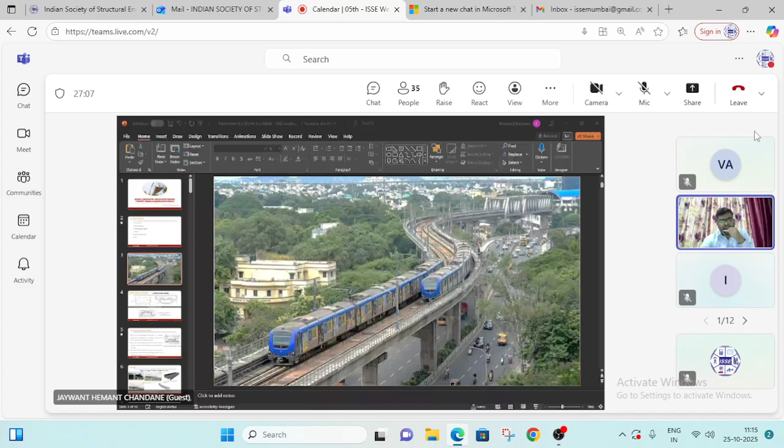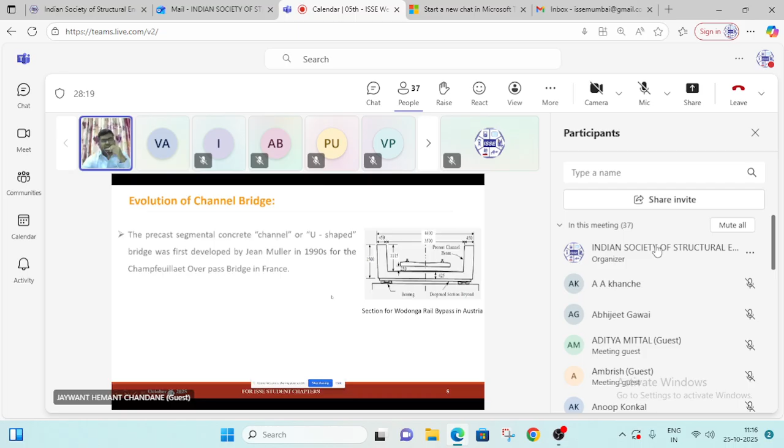Yes, the precast segmental channel, U-channel shaped bridge, was developed by Jean Muller in the 1990s for Champfeuillaet Overpass in France. Actually he is a bridge engineer, and he closely worked with Freyssinet also, who introduced the PSC phenomenon.

After this, the very famous consultant Systra developed the precast prestressed concrete U-shaped bridge, based on the original channel bridge constructed in France. Systra has done much research on the U-girder and has patented it.

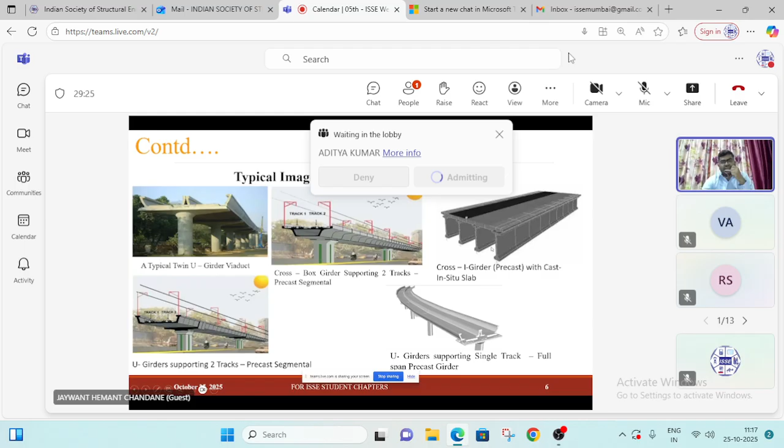Here are the different types of superstructures. In figure one we can see the twin U-girder viaduct, then box type girder supporting two track I-girder, then U-girder with two tracks, and U-girder supporting a single track rail. Our point of discussion today is the U-girder supporting a single track.

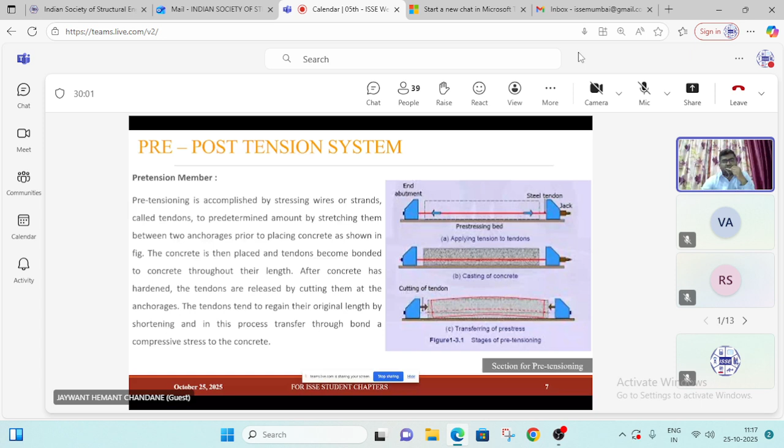Let me introduce the phenomenon of post-tensioning and pre-tensioning. In pre-tensioning, we first prepare the bed, and the cables are stressed. Then after 3 to 4 days, the concrete is laid over it, and at the time of transfer, there is some hogging portion we have to observe.

This hogging is because of the eccentricity developed during the stressing transfer. So the girder will hog at the time of transfer, and then it will reduce after application of self-weight, application of SIDL, and application of live load. So we have to check hogging also in this girder. This is the phenomenon of pre-tensioning.

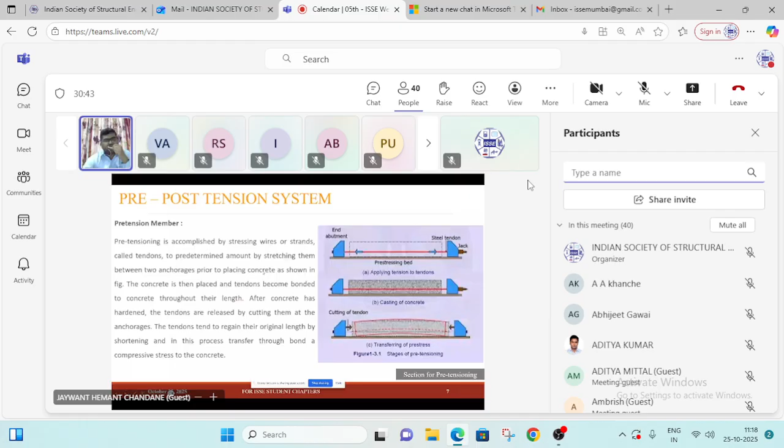Then post-tensioning: in post-tensioning the concrete is poured first, and the tendon HDPE duct is placed along the profile. In that we have the freedom to profile the cable inversely to the shape of the bending moment, because in post-tensioning we give tension to the cable after concreting. So we can profile the cable with respect to the shape of the bending moment, and there will be a number of cables.

The HDPE pipe is kept at the time of concreting. Then, after achieving some strength, the tendons are placed at their position and then stressed. So this phenomenon is for post-tensioning.

Now we come to the losses in pre- and post-tensioning. In pre-tensioning, the losses are: loss due to elastic deformation, loss due to relaxation of steel, loss due to shrinkage, and loss due to creep. While in post-tensioning, there is loss due to elastic deformation in concrete if wires are tensioned successively.

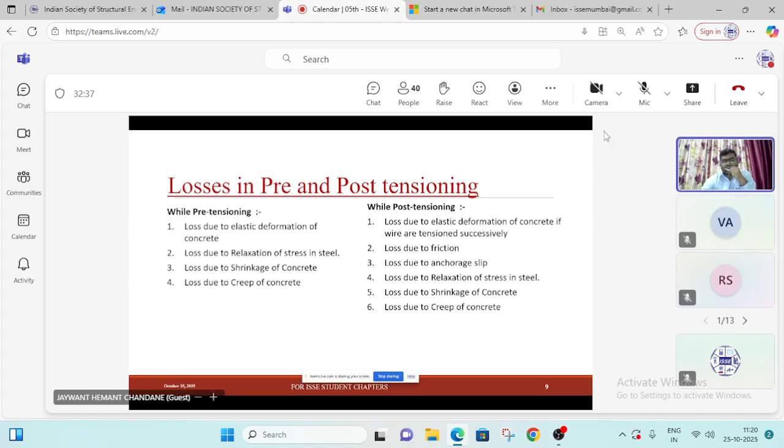Suppose in a beam there are three cables. First we tension the bottommost cable, so there is no loss due to elastic deformation in post-tensioning at that point. But after the second cable is tensioned, there is some loss in cable one because of the shortening of the concrete. And when we tension the third cable, there is no loss in the third cable, but there is loss in the first and second cables. So successive loss occurs due to elastic deformation in post-tensioning.

Then loss due to friction. While stressing, there is friction between the concrete and the tendon, so this loss due to friction is present in post-tensioning.

Loss due to anchorage slip: when the wedges are released after immediate stressing, there is a slip in the anchorage, which we consider as maximum 6 mm. Then loss due to relaxation.

The relaxation loss occurs because the stressed steel relaxes over the period of time, so relaxation loss comes into the picture. Then loss due to shrinkage and loss due to creep. The loss due to relaxation, loss due to shrinkage, and loss due to creep are the long-term losses in prestress.

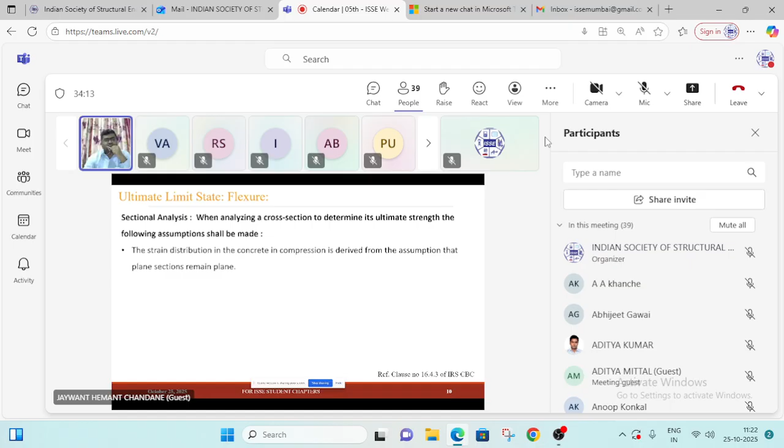So in section analysis, when analyzing the cross section for its ultimate strength, the following assumptions are made. The strain distribution in concrete in compression is derived from the assumption that plane sections remain plane. The stress in concrete in compression is derived either from the stress-strain curve or using the partial safety factor gamma m equal to 1.5 for FCK, in the case of a rectangular or flanged section with the neutral axis in the flange.

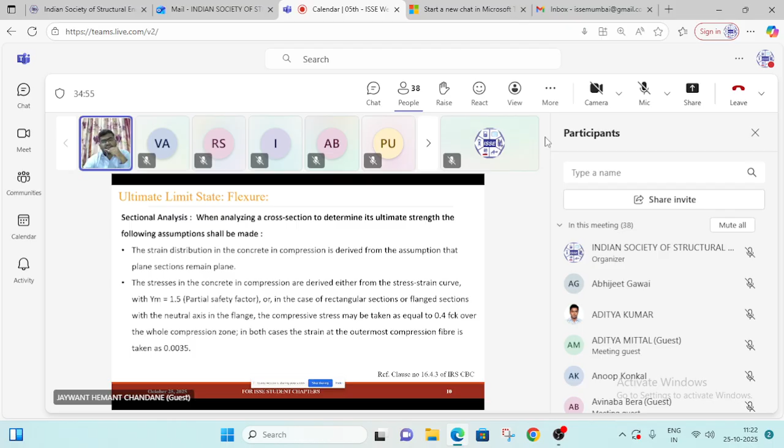For the compressive stress, it may be taken equal to 0.4 FCK over the whole compression zone, considering 0.4 FCK as a uniform distribution in the compression zone. In both cases, the strain at the outermost compression fiber is taken as 0.0035, the strain value of the concrete, and the tensile strength of the concrete is totally ignored.

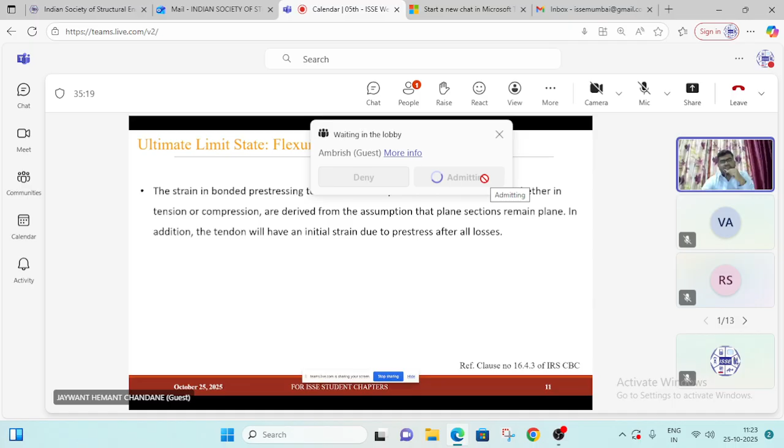The strain in bonded prestressing tendons and any additional reinforcement, whether in tension or compression, is derived from the assumption that plane sections remain plane. In addition, the tendon will have an initial strain due to prestress after all losses, meaning the additional tension reinforcement also needs to be considered.

The stress in bonded prestressing tendons, whether initially tensioned or untensioned, and additional reinforcement, are derived from the appropriate stress-strain curve, with gamma equal to 1.15 as the factor of steel representing the tendon.

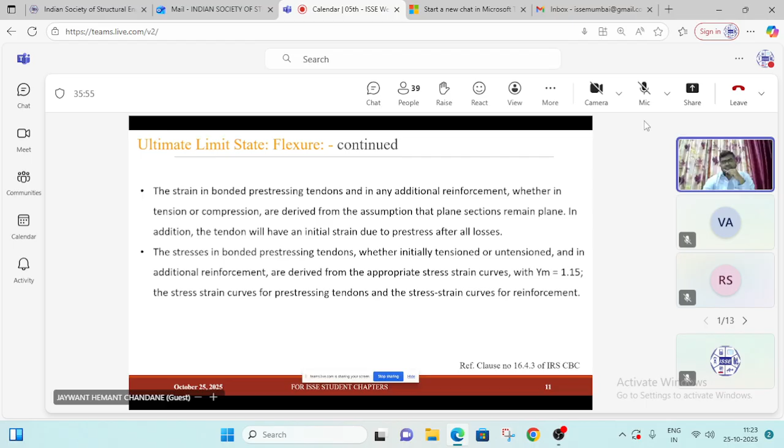Here the diagrammatic representation of that concept of the ULS. Here X is the depth of neutral axis, and as written in theory, for FCK there is a uniform distribution of stress, where MU is equal to FPB APS multiplied by the bracket d minus 0.5 x.

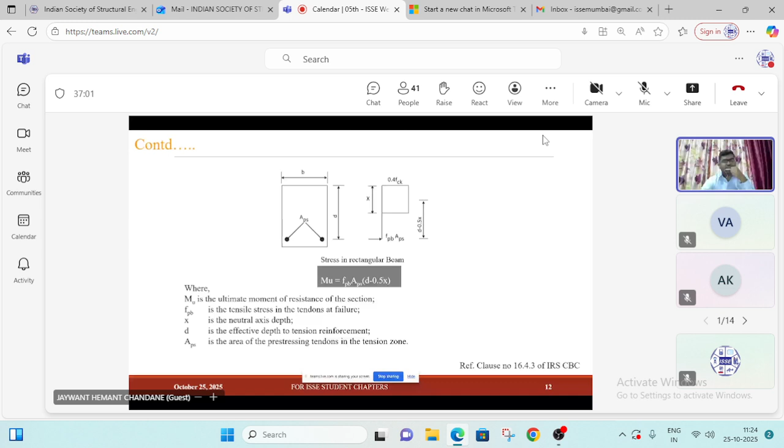The theory is also mentioned in IRS clause number 16.4.3 of IRS CBC. Calculation of shear reinforcement, and shear is calculated only for ultimate limit state.

At any section, the ultimate shear resistance of the concrete VC shall be considered in both the uncracked and cracked flexure condition, and any necessary shear reinforcement shall be provided. For a cracked section, the condition of maximum shear with coexisting bending moment, and maximum bending moment with coexisting shear, both need to be checked.

In the calculation of VCO, the value of FCP shall be derived from the pre-stressing force after all losses have occurred, multiplied by an appropriate factor value of gamma FL, which is the partial safety factor.

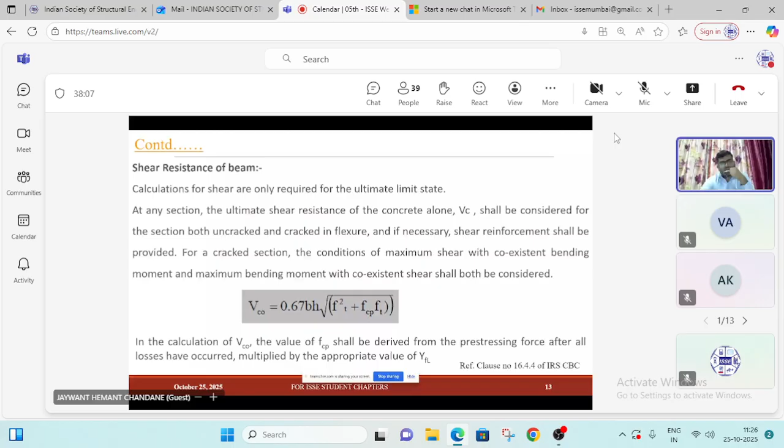And then FT is mentioned here. FT is the tensile stress of the concrete, which is 0.24 times the square root of FCK. FCP is the compressive stress at the centroidal axis due to pre-stress. B is the width of the member, and H is the overall depth of the member.

So by all these values we will get the VC, and the minimum reinforcement shall be provided by this formula: ASV by SV is equal to 0.4B by 0.87 FYV.

Here FYV is the characteristic strength of the stirrups, which shall not be greater than 415. Suppose we use FE 500, then also we have to consider 415 only as the maximum limit. ASV is the cross sectional area of the leg. SV is the spacing of the stirrups, and minimum shear reinforcement shall not be less than 0.2% of the web area in plan for mild steel, and 0.12% of the web area in plan for HYSD bar. This is as per clause number 16.4.4 in IRS CBC.

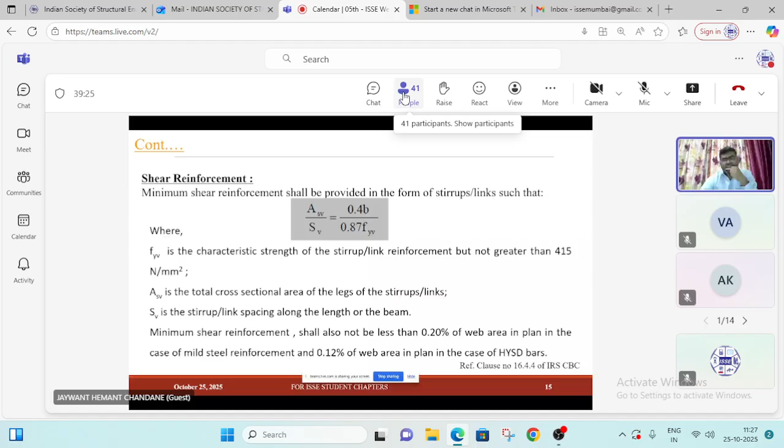So before we can start the problem now, there are various software used for the analysis. So I will present a few software here: STAAD Pro, Midas, Sofistik, and Lusas.

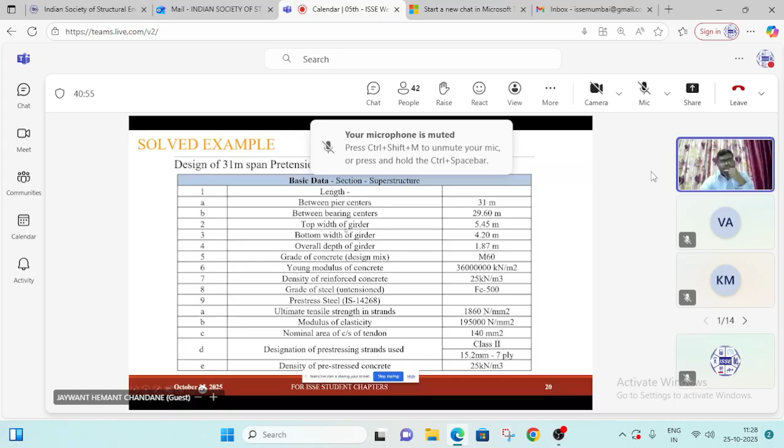Then the top width of the girder I have considered as 5.45. Bottom width of the girder I have considered as 4.2. Overall depth of the girder is 1.87, and concrete grade for the concrete mix design is M60, and Young's modulus is 36 into 10 raised to 6. Density of concrete is 25 kilonewton. Grade of steel is Fe 500. Prestress ultimate tensile strength of strand is 1860.

And modulus of elasticity of PSC strand is 1.95 into 10 raised to 5. And the nominal cross sectional area of the strand is 140 mm square, for the 15.2 mm 7 ply system. Density of pre-stressed concrete is 25 kilonewton per meter cube.

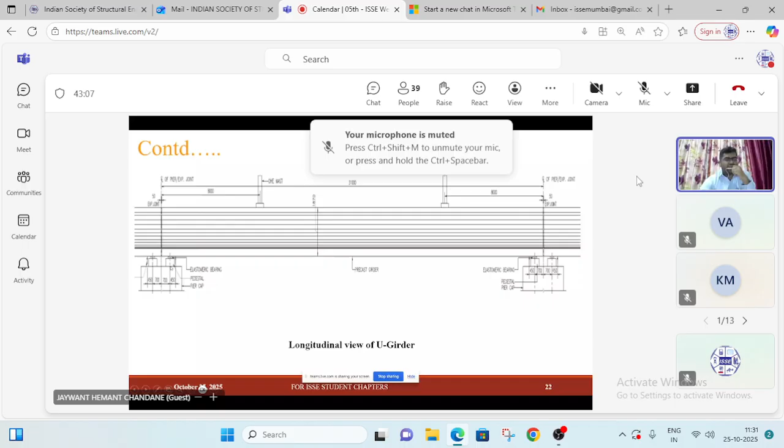The methodology adopted: STAAD Pro software is the main software used to work out the analysis, and Excel is used for presenting the results and conclusions. 2D analysis will be carried out for the longitudinal analysis, and 3D analysis will be done in transverse direction with respect to the plate element in STAAD Pro.

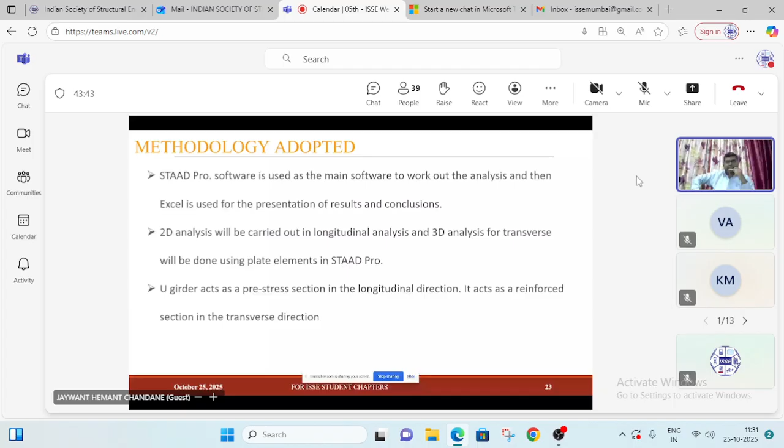So the U-girder acts as a pre-stress section in the longitudinal direction, and it acts as a reinforcement section in the transverse direction.

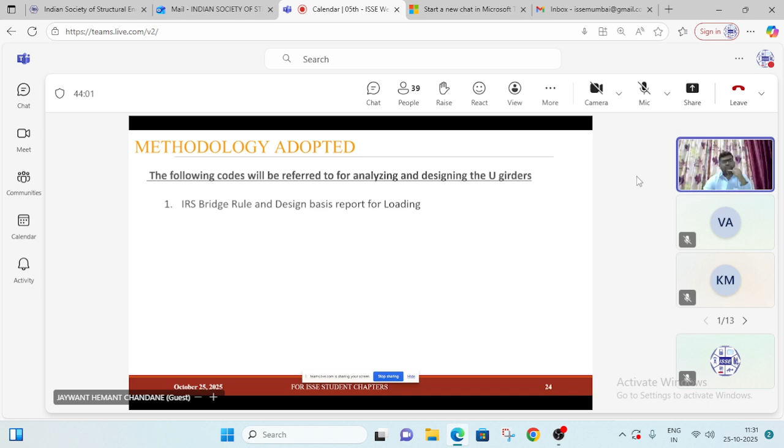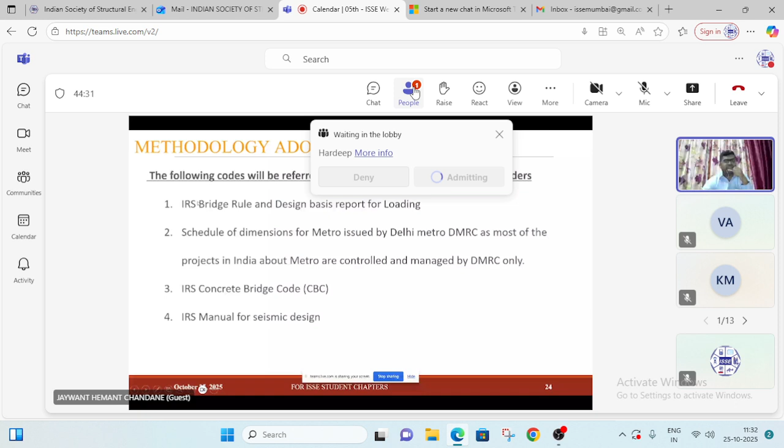The following codes will be referred to in the analysis and design of the U-girder: IRS bridge rules and the design basis report for loading, and the schedule of dimensions of metro issued by Delhi Metro DMRC, as most metro projects of India are controlled and managed by DMRC only. IRS CBC is a design code from the railway, and IRS manual for seismic design. Basically, IRS bridge rules give all the loading details and impact factor for the live load, the schedule of dimensions is considered from DMRC, and IRS concrete bridge code is the design code.

After analysis, we will design with respect to the IRS CBC code, and for seismic load calculation, we use the IRS seismic manual.

The temporary stress in the extreme fiber: the permissible compressive stress as per table number 24 of IRS CBC is 0.5 of FCK at the time of transfer stress. I have considered 40 MPa, so 40 into 0.5 is 20 MPa. The permissible temporary tensile stress is 1 Newton per mm square.

But the stress in extreme fiber at service condition is 0.4 of FCK. As earlier mentioned, if we use M60 grade, M60 into 0.4 is 24, and there is no tensile stress permitted during service.

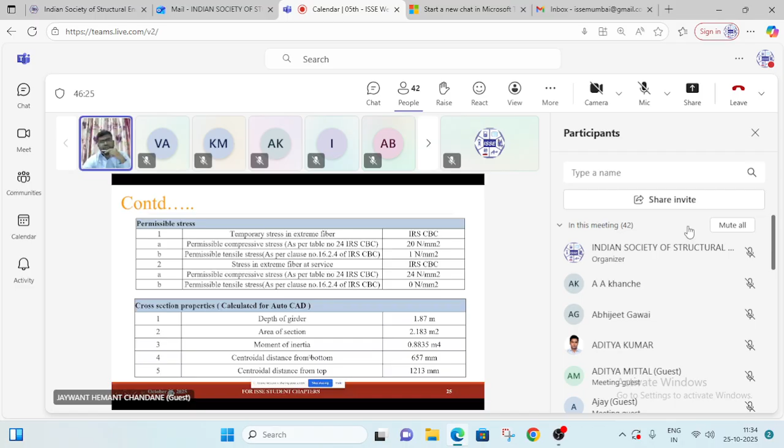The girder dimensions and sectional properties are calculated from AutoCAD. So 1.87 is the height of the girder, and cross section area of the girder is 2.183. Moment of inertia is 0.8835, and CG from bottom is 657 mm, and CG from top is 1213 mm. This dimension will be referred to further for the stress calculation at various intervals, so this dimensioning is very important for the further calculation of mass properties of the section.

Now the superimposed dead load is considered from DBR: rails, cable through cable tray, handrail, plinth slab, lightweight deck drainage, OHE mast, and miscellaneous. For double track, the summation is 6.05 ton per meter, and for single track it is divided by 2, so 3.05 ton per meter.

So intensity of dead load - now we come to the loading part of the longitudinal analysis. Intensity of the dead load is coming from the cross section area into the density of concrete: 2.183 into 25 is 54.575, and superimposed dead load is 3.05 ton per meter, which converts to kilonewton per meter: 29.92 simply multiplied by 9.81. We have also considered the solar panel load at the U-girder, which is 0.5 kilonewton per meter.

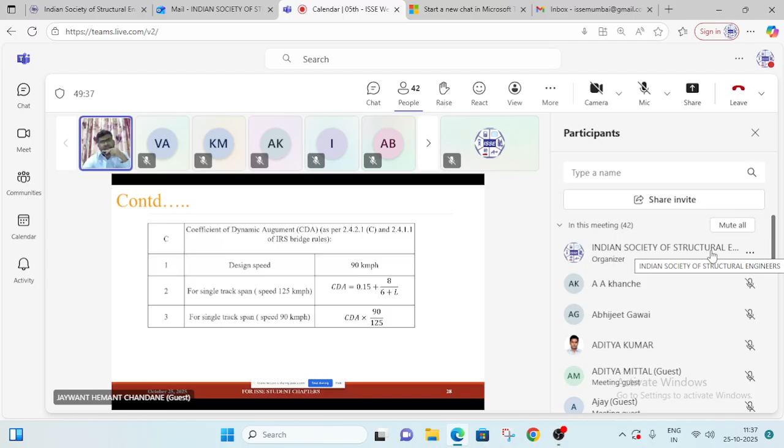Our design speed I have considered is 90 kmph, and the code has given the CDA for 125 kmph. CDA is equal to 0.15 plus 8 divided by 6 plus L, where L is the span. So for 90 kmph, that ratio we have to multiply it.

Then the modeling I have done - the superstructure analyzed as a complete beam model, representing the total length of 31 meters, and I have provided nodes at certain intervals. It is required to check the stresses at certain levels, around every 0.5 to 1 meter level throughout the span. So for taking the bending moment and shear force at that location, I have introduced nodes in between, throughout the span, with dimensions ranging between 0.5 to 1 meter.

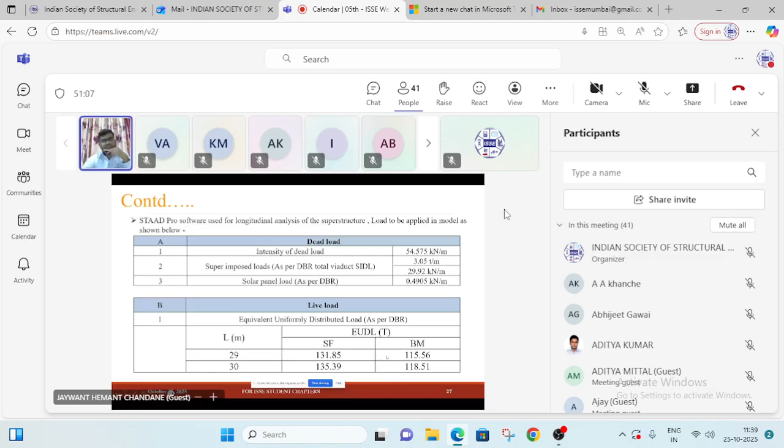The vertical train load can also be carried out by running the train through a line model, by providing a live load definition. That is the second method, but I have used the equivalent EUDL method, where we simply apply the UDL on our member.

The property mentioned is area 2.183 AX, and here is the moment of inertia - the property of the member, and the loading part starts with self-weight of the U girder, SIDL, UDL for bending moment and shear force without CDA.

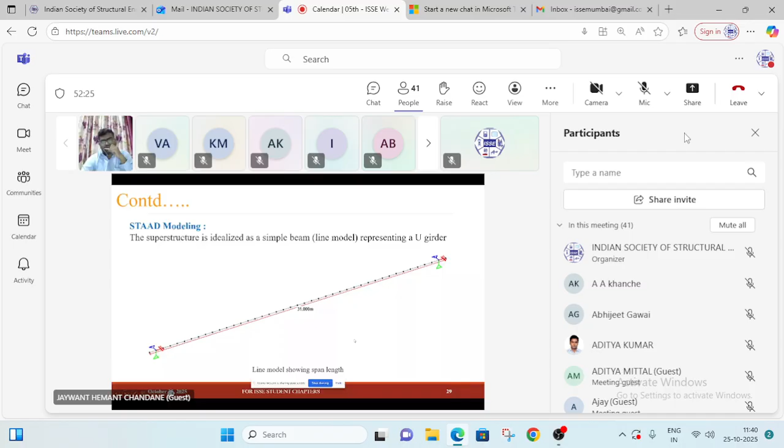Here the dead load as calculated above is 54.575. Then the equivalent SIDL is 29.92 as calculated above, and the solar panel load is single web, so multiplied by 2, and EUDL is for bending moment and for shear force. It is per meter - here we have seen the values for the total length, so I have converted it to per meter length.

Then another loading is seismic load. Here we complete up to the live load, then the seismic load we have to work out. I have considered the location as Bangalore, so it is zone 2. The seismic coefficient AH is calculated as per the formula below: AH equals Z by 2, I by R, and SA by G. For zone 2, Z is equal to 0.1 - that value I have taken from the IRS seismic code.

As it is an important structure, the importance factor I is equal to 1.5. The response reduction factor for the superstructure is given in table number 3 of IRS is 2, and SA by G, the spectral acceleration coefficient, is considered as 2.5. The vertical seismic coefficient as per code is 2/3 of AH. So AH is equal to 0.09375 and AV is equal to 0.0625.

I simply input the values in the formula for AH. 2/3 for this is 0.06250.

Then I have to consider and calculate the moment coefficient for dead load and live load. For that we require the lever arm for dead load and live load. The lever arm for dead load is the CG from the bottom of the girder, and the lever arm for the live load is 2.6 meter, which is the CG from the soffit of the girder, and the center to center distance between the two webs.

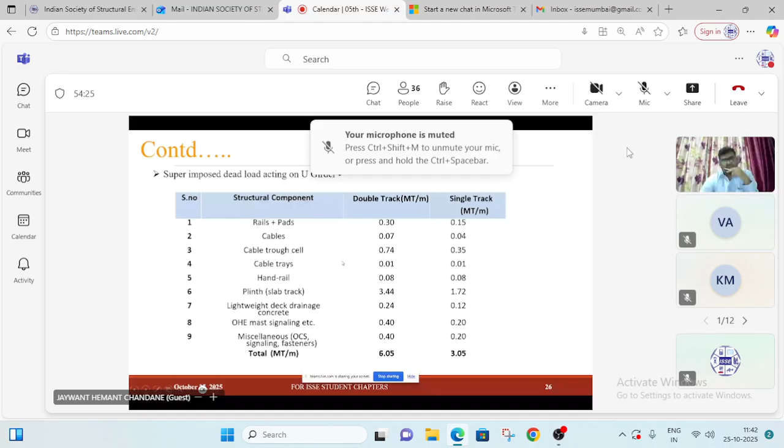3.82 - so for moment coefficient calculation, the AH factor multiplied by CG will give the moment, divided by the center to center distance between two webs, which is 3.82. So the moment coefficient factor is 0.0161.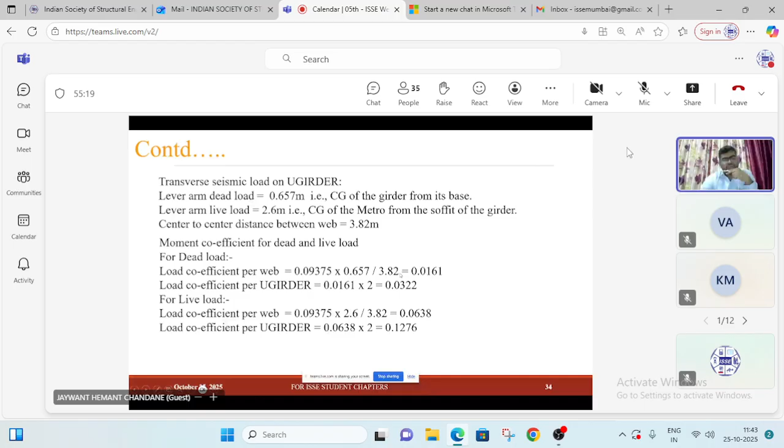That is why I calculated the moment coefficient factor - we have to convert the self-weight moment into the seismic moment for that. The load coefficient per web is 0.0161, and for the total U girder it is 0.0161 into 2. For live load, the same concept applies - the CG will change, and the values are as per that.

Seismic bending moment at midspan: here our bending moment due to dead load from the STAAD is 5960, and due to SIDL is 3377. The bending moment due to live load at midspan is 50% - we have to consider this for the transverse direction, and it is 2125. So for the transverse seismic bending moment, it is 5960 plus 3377 into 0.0322.

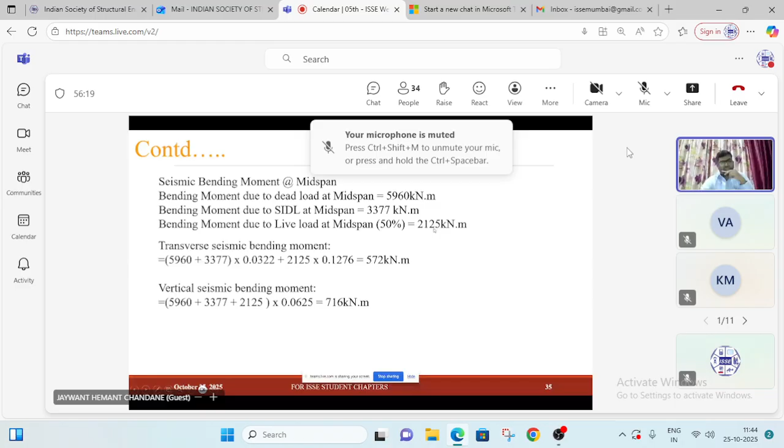That is the coefficient factor, plus the self-weight and live load bending moment into the live load factor. So here we get the seismic bending moment for the transverse direction. Similarly, we have to work out the vertical bending - the AH is 0.0625 as calculated earlier, and the value of bending moment is 716.

So as per this, we have calculated the seismic moment, and now the wind load. The basic wind speed is calculated as per IS 875 part 3. As per figure 1 of IS 875, in Bangalore location the basic wind speed is 33 meter per second. As per code and provision, the values of K1, K2, K3, K4 are calculated and written here from the respective clauses. So Vz is equal to Vb into K1 into K2 into K3 into K4. This comes to 35 meter per second, and Pz is equal to 0.6 Vz square, which is 0.735.

So our exposed area is the height of the U girder, when the load is acting on superstructure only. Our exposed area is 1.87, and the force will be 0.735 into 1.87, which is 1.37 kilonewton per meter. The lever arm for that is simply h by 2, so 0.5 into 1.87 is equal to 0.935.

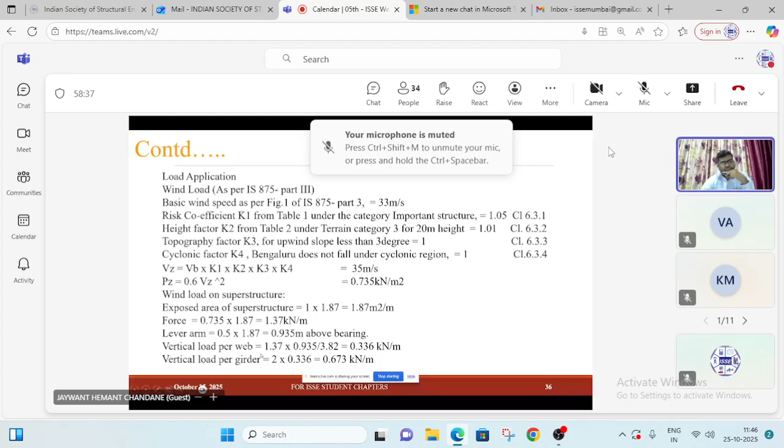Now, similarly, we have to transfer that load in the vertical direction. So 1.37 is the intensity into lever arm, divided by center to center distance between the webs. For a single web it is 0.336, and for the total U girder it is 2 into 0.336, because we have two webs.

Now with live load we have to calculate the exposed area above the depth of superstructure, which is 1 into 3.12. Here the superstructure height will not be considered, it is 3.12 above the superstructure. So force, as calculated earlier, is 0.735 into 3.12 as the exposed area, giving a force of 2.29, and lever arm is 0.5 into 3.12 plus 1.87, which is the depth of superstructure.

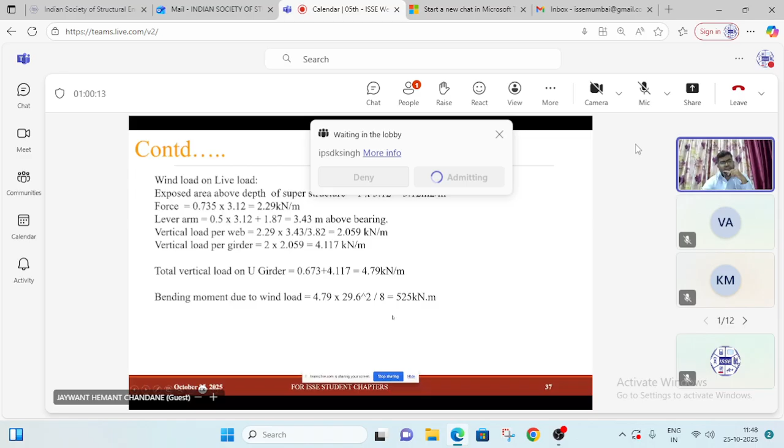So total vertical load on the U girder is 0.67 when only self weight is there up to 1.87 height, and with live load it is 4.79. Then, since our girder is simply supported in the longitudinal direction, the moment is WL square by 8. So here we get 4.79 as the intensity UDL into center to center span divided by 8, which is 525 kN meter.

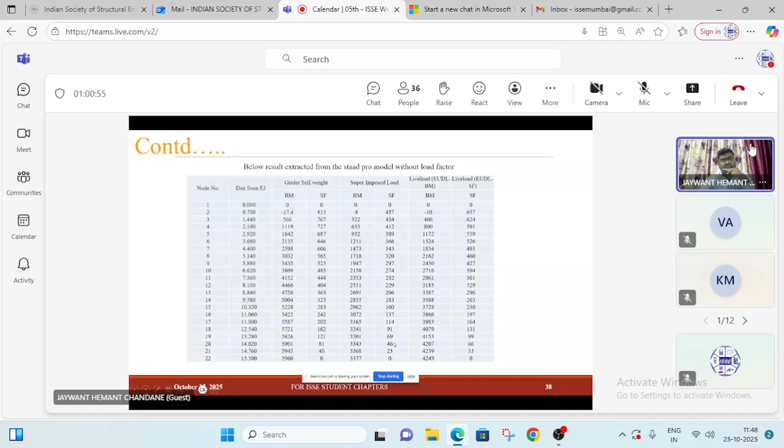So now after application, as I mentioned, I have considered several nodes in between for the total 31 meter span. The bending moment for self weight, superimposed dead load, and live load for bending moment, and live load for shear force, are tabulated. So for the design, due to time constraint, I have considered the example of calculation of stresses at midspan for the 15.5 meter.

So here, self weight bending moment is 5960. SIDL bending moment is 3377, and live load bending moment is 4249.

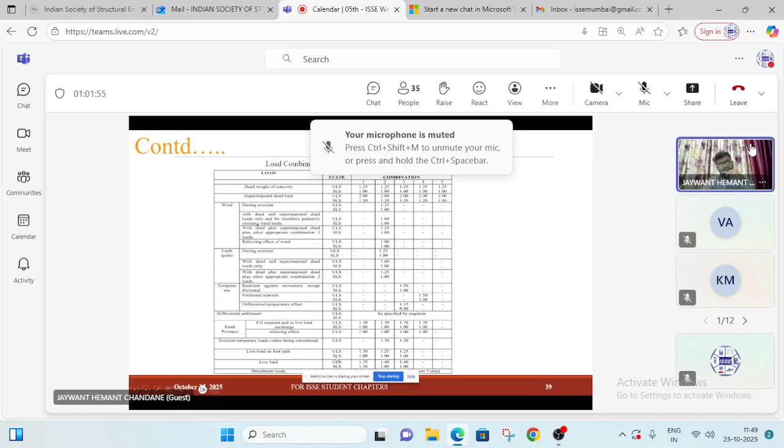So now we move to the load combinations. These are given in IRS CBC table number 12. For dead load, the dead weight factor is for ULS 1.25 and for SLS 1. SIDL for ULS is 2 and SLS is 1.2. And for live load it is 1.5 in one ULS case, 1.75 in another ULS case, and 1.1 in SLS case.

So we require majorly the three loads: dead load, superimposed dead load, and live load, because it will be critical only in the combination.

So here, moments at midspan I have calculated. As shown, the dead load bending moment at midspan is 5960. SIDL bending moment is 3377. Live load bending moment at midspan is 4249. Then similarly, self weight wind load bending moment is 525. Seismic transverse and seismic vertical are 572 and 716.

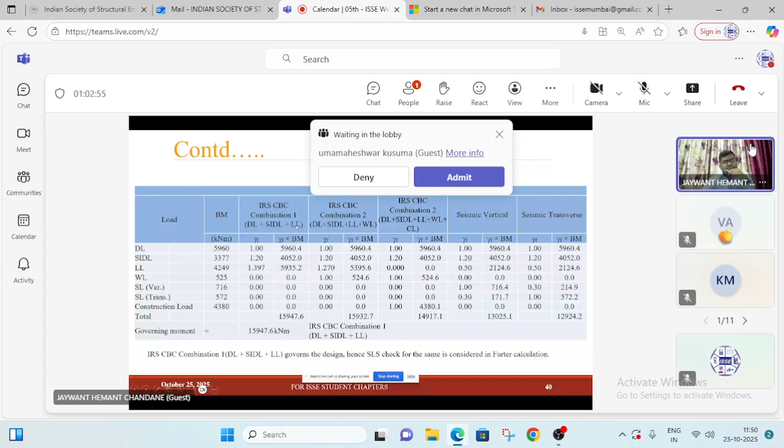Here is the load combination. The first one is dead load, SIDL, and live load. For dead load, this is the serviceability limited condition. There are two conditions for design: serviceability limited for stress check, and ULS for ultimate design. So we are looking at serviceability limited. For serviceability limited, factored dead load is 1, SIDL is 1.2, and live load is 1.1. But here we also consider the CDA factor, the impact factor, also called the coefficient of dynamic augment. Its value comes to 1.397.

So now, the second combination considers wind load, and the third combination considers seismic transverse and seismic vertical. So the critical combination turns out to be dead load, SIDL, and live load. So for further calculation, I have considered only this first combination. You have to check which combination is going to be critical. Here what happens is my wind pressure is also less, and seismic zone is also 2. But sometimes in seismic zone 3, 4, 5, this case can also be critical, so accordingly you have to go for further calculation.

Similarly, for ultimate limit state, only the factors are changing; all the moments without factors remain the same. So here also combination one turns out to be critical, so I have used combination one only for further calculation.

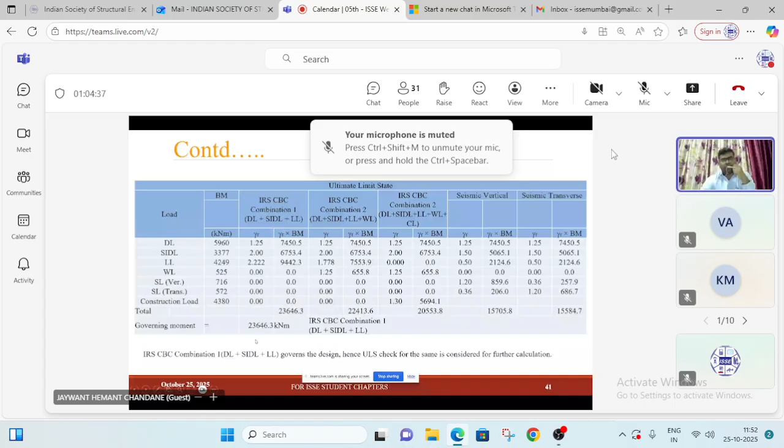Now we will move to the stress check calculation. For the stress check SLS condition at midspan, I use the ultimate free stress of 1860 Newton per mm square. At the time of jacking, we have to consider 0.75 into ultimate free stress.

So it is 1395. Here is the basic theory of prestressing I have presented, the distribution of prestressing force and bending moment. For P by A, all section is in compression where the prestressing applies to the structure. Then prestressing moment is P into E by Z. It will give compression at bottom, and at top there is some tension.

Self-weight bending moment, as per shape of the bending moment diagram, there is always tension at bottom and compression at top at midspan. Similarly for SIDL the same pattern of stress will be there, and for live load also a similar pattern of stress will be there. So in summation of all these stresses, there should be no tension in the final stresses. So that we have to take care of. Accordingly, the number of strands, number of cables, number of tendons we have to increase, or in some cases we have to change our construction also to provide compression at any section.

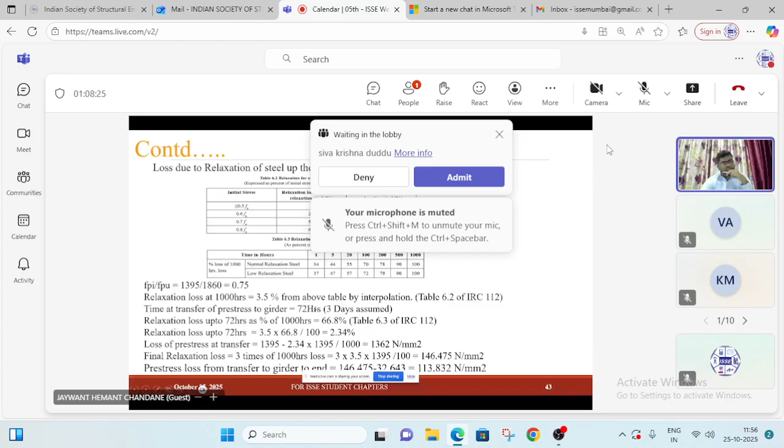So 2.34% loss in prestress up to 72 hours by relaxation only. The loss in prestress is calculated as 1395, the original stress, minus 2.34% of it. So the remaining stress after 72 hours is 1362 in the tendon.

Then the final relaxation loss, as per codal provision, is 3 times the 1000 hour loss. So 3 into 3.5 into 1395 divided by 100 is 146.475. That is the total final loss, but we have already considered the loss at 72 hours. So from that final loss, we have to reduce the loss up to 72 hours. So the effective final loss is 113.832.

Then the loss due to elastic shortening. Elastic shortening loss is the average stress at the level of steel only. Here FCK is M60, EC is equal to 36,000, ES is equal to 195,000, and the modular ratio ES by EC is 5.42.

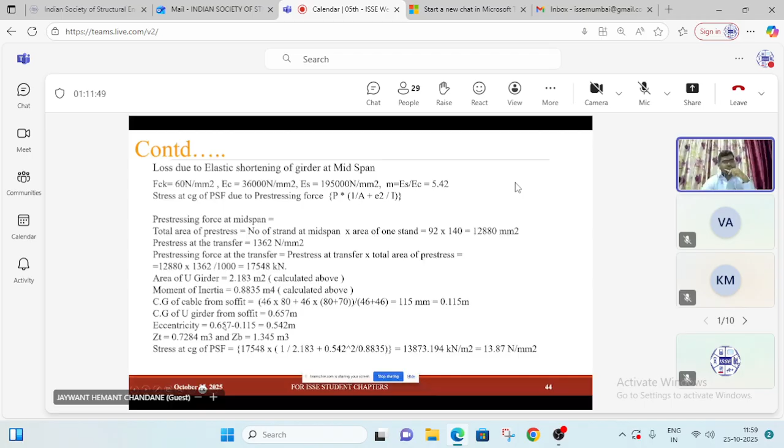So the stress at CG level of pre-stressing transfer is calculated from this formula. It is coming 13.87.

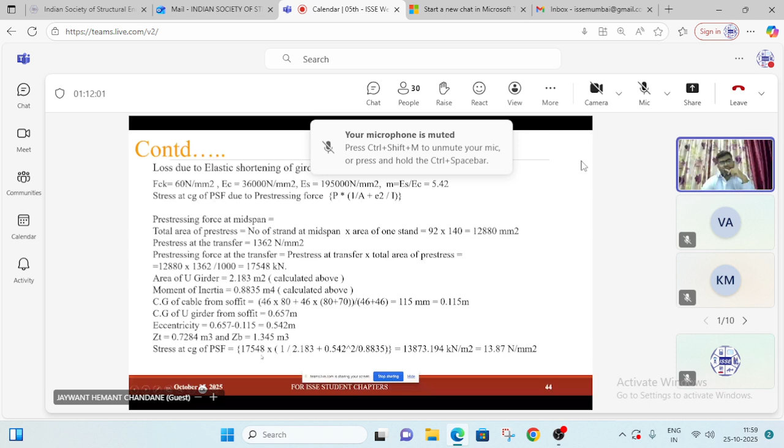So next, loss due to elastic deformation is moment. Now the moment at midspan is 5960, and here the SLS factor is 1. So directly consider the bending moment at 5960. Eccentricity similarly, then stress at CG of girder due to self weight is 3.65.

So total stress at the transfer of the CG of girder is 13.87 minus 3.65, which is 10.22. Considering average stresses, 10.22 is at midspan, but throughout the span it will be different stresses. So average stress throughout the span is 8.04. The pre-stress loss is m into average stress, where m is 5.42 and average stress is 8.04. So 43.55 Newton per mm square is the loss due to elastic shortening in the pre-stress.

So total force minus area into stress loss. So effective pre-stress is 16,987 remaining after elastic loss.

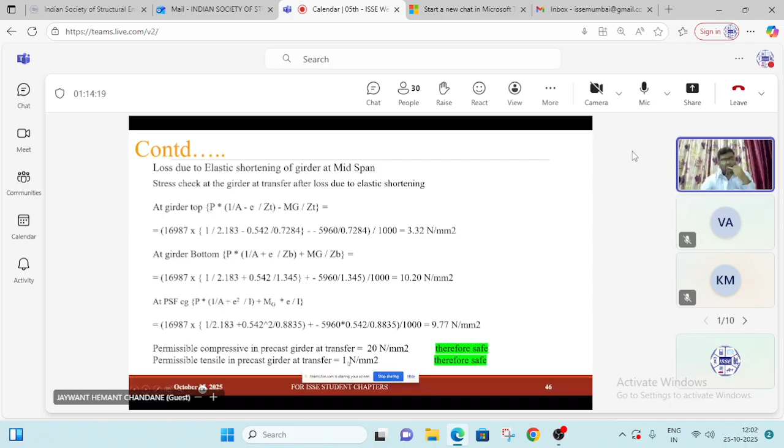Then after the creep loss, as per clause 5.2.4.1 of IRS, the creep strain is given as 4.3 into 10 raised to minus 5. So creep loss is simply creep strain into average stress into E, elastic ES. The average stress for creep is 7.71, so 7.71 into 4.3 into 10 raised to minus 5 into ES gives 64.64. Actually, IRS code has simplified and directly provided the value of creep stress in the code.

But in IRC 112 they have given various formulas to work out the creep stress. So in IRS it is a very simplified creep stress given in the code. So loss due to shrinkage.

Shrinkage strain is also given as 0.0003. So loss due to shrinkage is strain into the stress E value, which gives the stress. Total loss due to relaxation as calculated above is residual minus total loss minus 72 hours loss. So total loss due to creep, shrinkage and relaxation is 237.03.

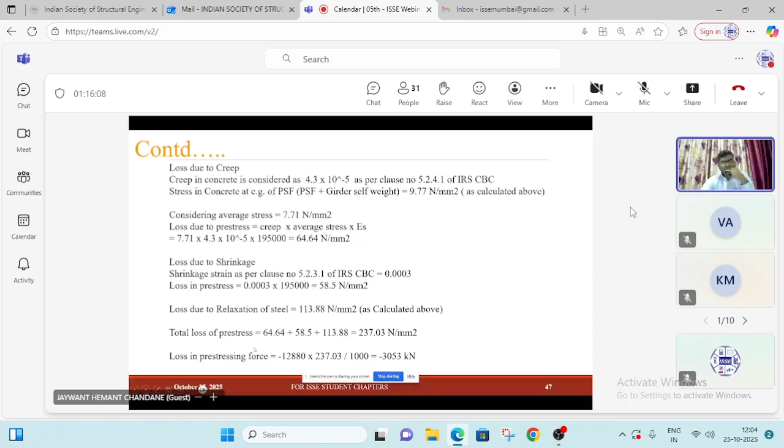So we have to work out the effective stress after all the losses. If loss in force due to shrinkage, creep and relaxation is 3053, then effective stress requires us to reduce that force calculated earlier, which is 16987.

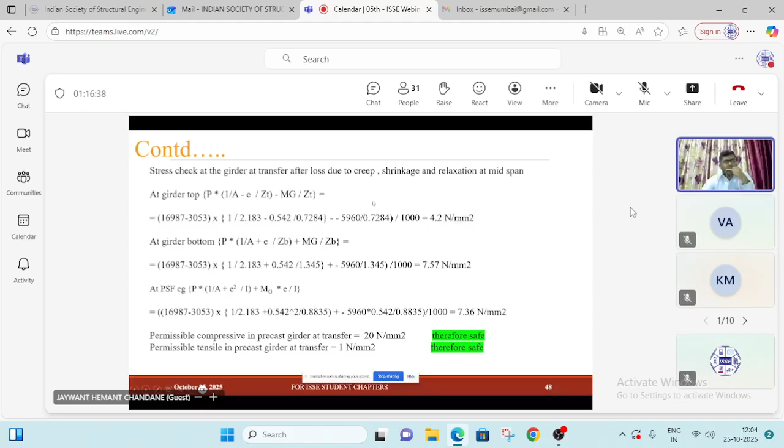So here, in a similar way, we have to calculate the stresses at top and bottom after reducing the forces. We need to check that all are within permissible limits or not. This needs to be checked in all the sections. Here I consider midspan.

Now after application of the SIDL, we have to understand the flow of the construction method, at which time which load is applied. So now SIDL moment, which is factored with a 1.2 factor, and M by ZT and M by ZB for top and bottom of the girder, and previously remaining was 4.2, so 4.2 plus 5.56. So as we go further loading, there is an increase in compression at top, and a reduction in compression at bottom, as will be seen.

So now after live load application, we can see the stresses. In a similar way, we have to work out the live load as SIDL. So MQ is the maximum moment at live load with the impact factor, CDA, and the partial safety factor. So it is 8.15 at top, which is a compressive stress, and at bottom it is a tensile stress of minus 4.41.

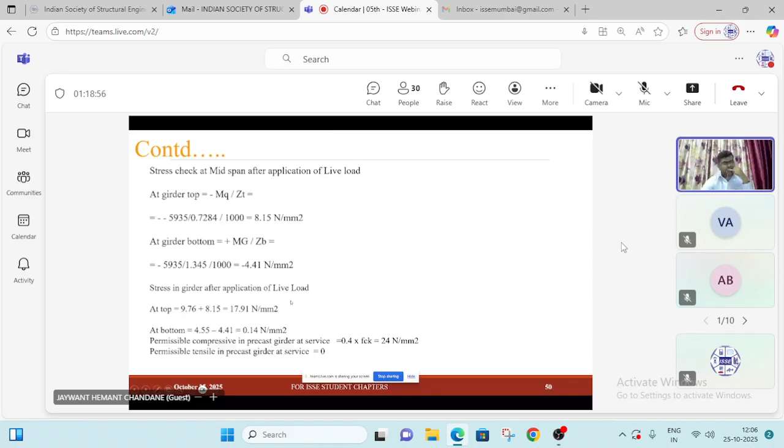So summation of our residual stress up to SIDL is 9.76 at top. So 9.76 plus 8.15 is 17.9, and at bottom our residual earlier was 4.55, so 4.55 minus 4.41 remains 0.14. So we check this at service condition. The permissible compressive stress in service is 0.4 into FCK, which is 24 Newton per mm square, and there is no tension permissible at service stress.

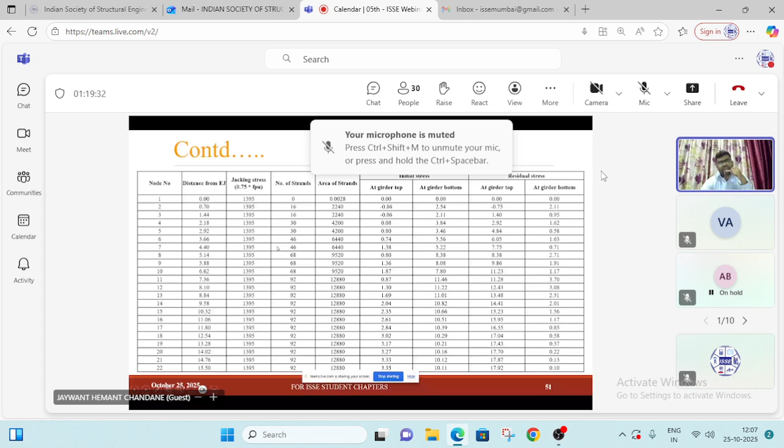So both conditions are satisfied to solve our problem at midspan. Here are different sections I have worked out, because we have very short time, so each and every section we cannot elaborate in this presentation. At the top girder and bottom girder, our stresses are there.

As the midspan bending moment is very high and it is gradually reducing towards the support, we have to provide curtailment in the prestressing tendon. Curtailment in prestressing tendon means debonding of the tendon is required in pretension, because we have to lose the contact between the concrete and steel for curtailment.

So at midspan, total 92 strands are active, and curtailment 1, curtailment 2, curtailment 3, curtailment 4 - I have furnished this in a table below, giving the numbers for each strand, 1, 2, 3, 4, 5, 6, like that, up to 92.

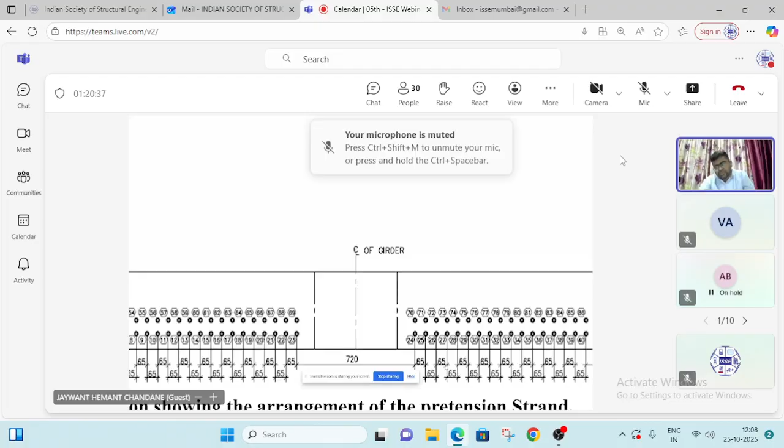So for debonding stress and curtailment, we have to give this clearly in our drawings and mention it very clearly, because the debonding of the strand has to be done at site. So the site has to understand which strand has to be debonded at which location.

So at midspan, total active bond is 92, and at 6.4 meter distance from the support, 68 strands are active and 24 are unbonded. From 4 meter distance from support, 46 are active and 46 are debonded, and at 2.5 meter distance, 30 are active and 62 are debonded, and at 1.44 meter from support, 16 are active and 76 are debonded.

Why do we have to debond those strands? Because we cannot provide full active strands throughout the section - at support there is no bending moment, but due to prestress there is a huge moment developed, and the girder will be hogged and it will crack and get damaged. So very carefully we have to mention this.

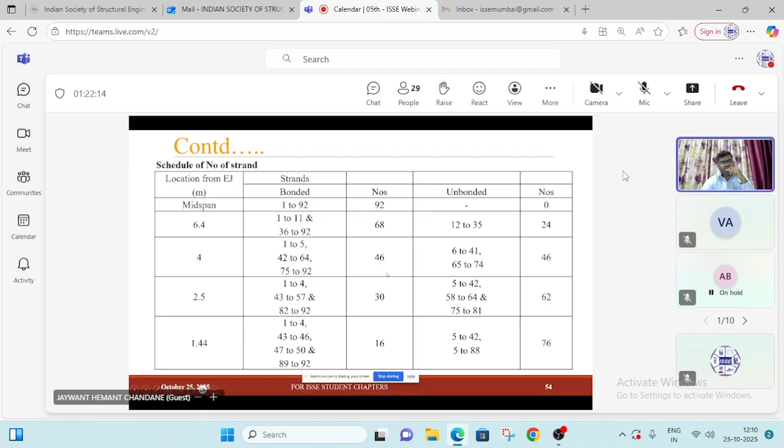Now let us move towards the ultimate moment capacity of the section as per IRS 16.4.3 of CBC. Here the input parameter, our bending moment as calculated above, is 23,646 for ultimate moment capacity.

We need to calculate XU by equating compression and tension. Our XU, I have calculated, is 1152.95, by equating the tension force equal to the compression force.

Here the CG is at 242, 628 is the total length of the web, because a uniform section will pass after 628, and the top flange is 700 at right side and 500 at left side.

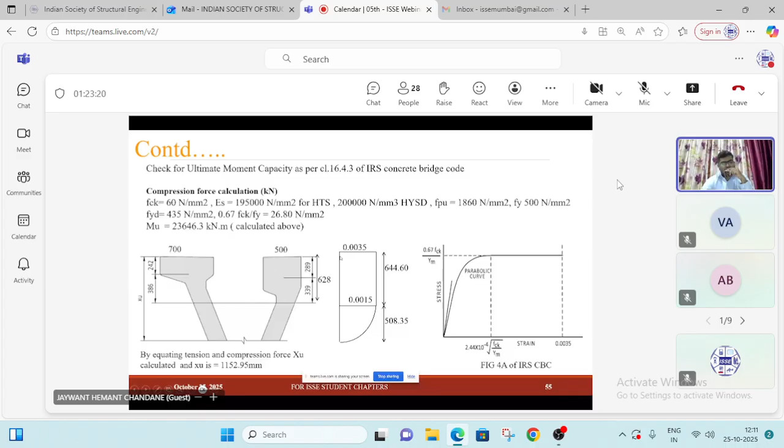The strain is 0.0035 at the top and 0.0015 at that distance. As per this parabolic curve, 2.44 into 10 raised to minus 4 divided by square root of fck by ym is 0.0015.

So for compression force, we have to calculate the area from AutoCAD, and CG from AutoCAD, with stress as 26.8. So total force at top bulb is 7772, CG into stress - area into stress, sorry - and bending moment is CG into that force.

The bulb will give more compression force than the web. So here the total compression force is 19,659.

So for steel also, I have equated that 19,659 with the 46 two times prestressing strands and area of prestressing 140. AST is 6440, CG from the bottom, and 80, and another cable is 150.

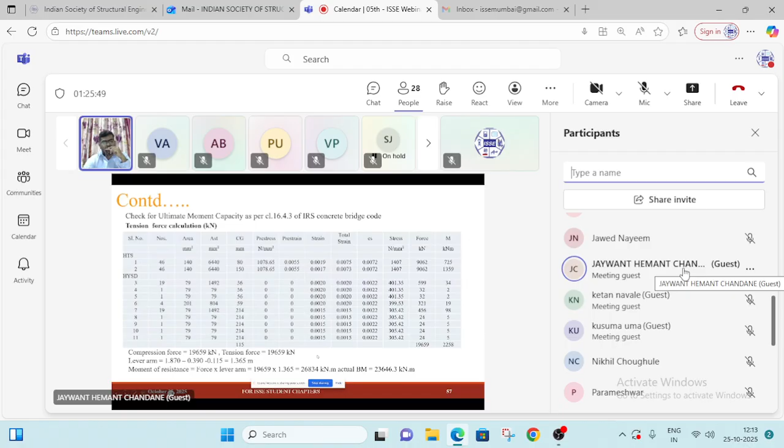So for force into lever arm, our moment capacity of the section versus actual bending moment of 23,646 - here the capacity of the section is 26,834. So we are safe in this ULS also.

Now we move to shear near the support. As I mentioned, we have to consider the relevant moment with respect to shear. So this moment is there - bending moment and shear force. The maximum factored shear force due to self weight is...

1015. Due to SIDL is 914, and live load is 1460.

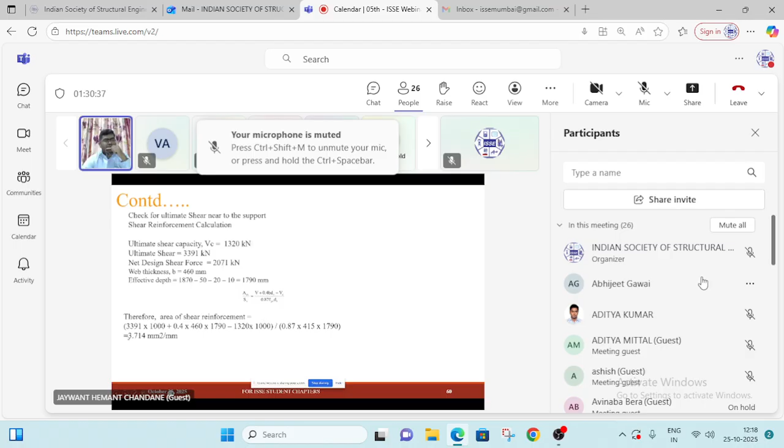So it comes to 3.714 mm square per mm.

So we have to provide reinforcement at 150 mm, or 100 mm center to center, multiplying it accordingly to get this much area of reinforcement.

So now we come to the transverse analysis of the U girder. Our session is going quite long, so now we have to increase the speed.

For the same problem statement, the basic data of the superstructure: span center to center is 31 meter, and bearing center to center is 26.9 meter.

Grade of concrete is M60, grade of steel is 500, and clear cover to reinforcement is 35. It is for RCC; as mentioned earlier, for the transverse analysis only the RCC section is considered.

Density is 25 kilonewton per meter cube, and superimposed dead load is furnished as per table. The rail and plinth, self weight of plinth is given next.

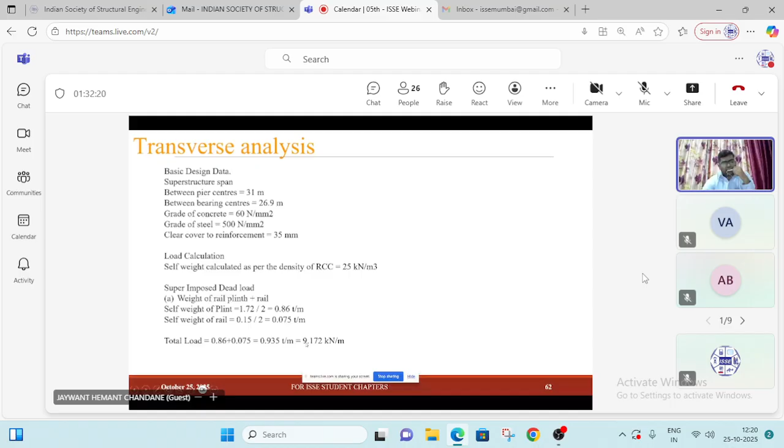Now for the self weight of lightweight deck drainage: it is 0.12 divided by 3.82, which is the center to center span between the girders, giving a center value of 0.31.

So weight of cable through cable stay. As I earlier stated in longitudinal analysis, same values I consider and apply.

So UDL we have to work out. Total summation is 8.47, so 8.47 divided by 2. So here we have model two web. So each wave we have to provide the load of 4.2183. Also solar panel individual web is 0.49. OHE mast weight is 0.2 ton per meter.

So live load for transverse analysis, we have to run the live load as a line model, not as per EUDL. So here the train spacing we have provided: A is equal to 2.02, B is equal to distance between two spacing 2.5, C is 12.7, and total length is 2A plus 2B plus C is 21.74 meter of one bogie, and dispersion width is 1:1 consider.

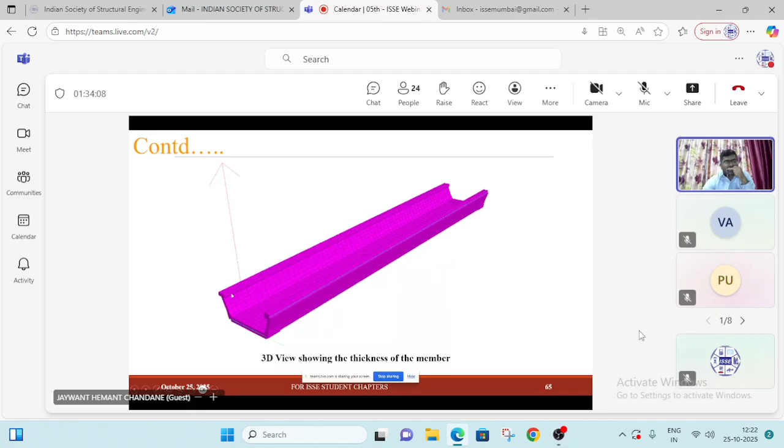And as longitudinally, we have to also divide the U girder in three zones. So first zone is from 1 meter from the CJ. Due to changes in the behavior of the structure from different intervals, we have to calculate and check the section at once near the support, in between support and midspan, and at midspan.

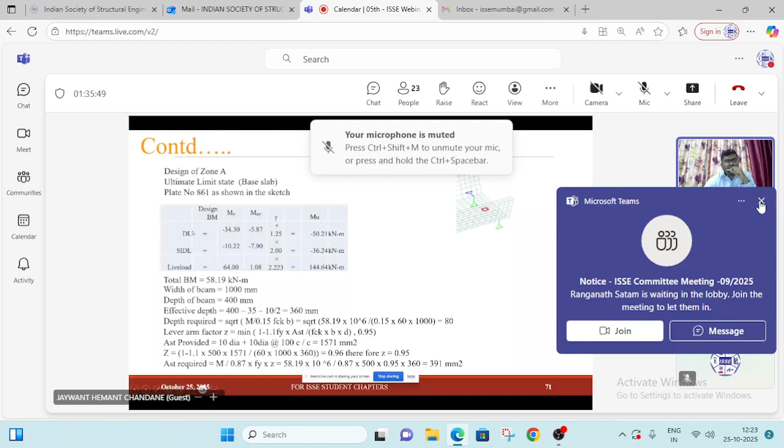So I have checked our structure near the support for zone A. So plate number 861 is there, which gives the maximum bending moment. The results for plate number 861 are tabulated. The bending Mxy total summation into partial safety factor. So here we have to take the ultimate moment.

So for live load it is giving hogging moment, maximum hogging moment at that plate. There is no sagging moment due to live load at support. So the summation total is 58.19 kilonewton meter. And as I mentioned, that is a bottom section, and transverse analysis will be done per meter width. So width of beam is 1 meter and depth of beam is 400.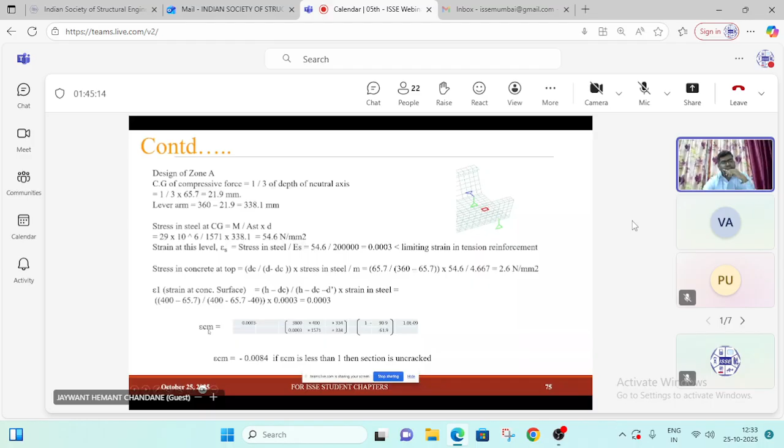I have the information over here. So ECM is coming to negative, which means the section is uncracked. So there is no check required for the crack width.

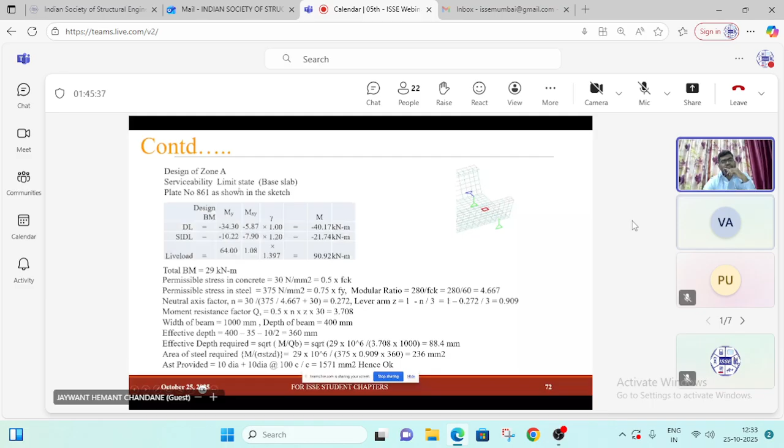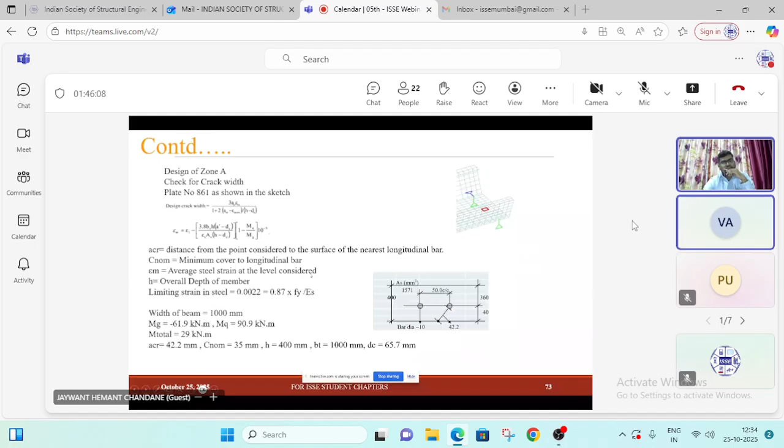So I have provided the calculation of zone A of base slab. Likewise, we have to work out the side wall also, similar pattern. And of another two zones, we need to check which plate gives the maximum bending moment, and that plate we have to consider and provide the calculation for similarly, and repeat again. So it is repetitive work. Once you work out one point, the rest is repetitive work.

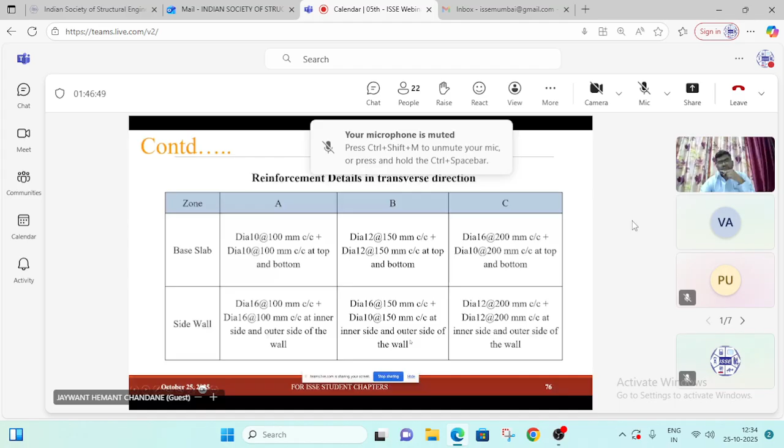So for zone A, zone B, zone C base slab, there is 10 dia at 100 center to center, side wall 16 dia at 100 center. Similarly, in zone B, 12 dia 150 center to center plus 12 dia 150 center at top and bottom of base slab, and 16 dia 150 center to center and 10 dia 150 center on inner side and outer side of the wall. Similarly, at mid portion, 16 dia 200 center to center plus 10 dia 200 center to center at bottom. Here we see at midspan, the spacing will increase, so the area of reinforcement will reduce.

This I have done the validation with manual calculation. All parameters I have considered, and the bending moment as actual and theoretical we have to compare. And the comparison in terms of material with the I-girder I have done.

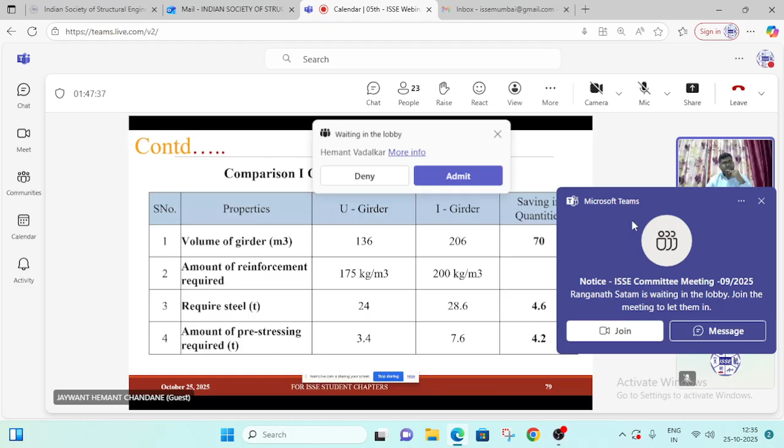So the volume of U-girder is 136 cubic meter, whereas if we provide two girders of 31 meter span I-girder with the deck slab and parapet wall, it comes around 206 cubic meter concrete volume. So there is a saving of 70 cubic meter in concrete.

Also, the area of reinforcement in deck slab will increase in I-girder, but in U-girder, which is monolithic U-type shape, there is 175 kg per cubic meter area of reinforcement. The required steel is 24 ton here versus 28.6 ton, so total 4.6 ton saving if you use U-girder instead of I-girder. And amount of pre-stressing required is 3.4 ton for U-girder, and 7.6 ton is required for I-girder.

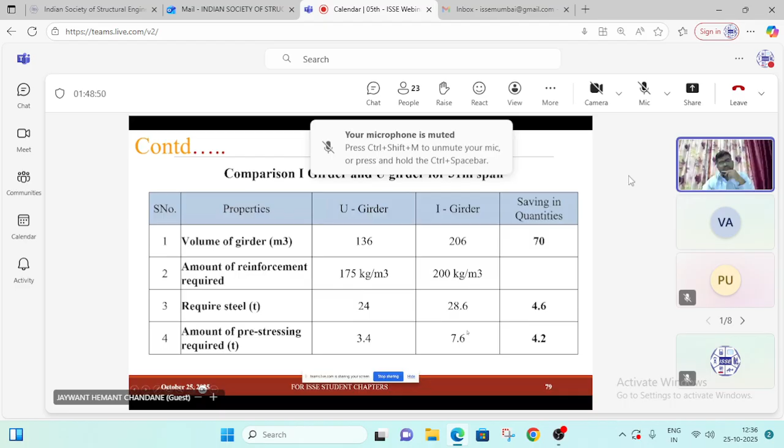So here are some benefits. U-girder is effective, no need for extra components. Parapet is not required for OHE mast and walkway. Reduction in size of foundation, and reduction in other components due to reduction in height, like the approaches and all. Saving in quantity is around 20%.

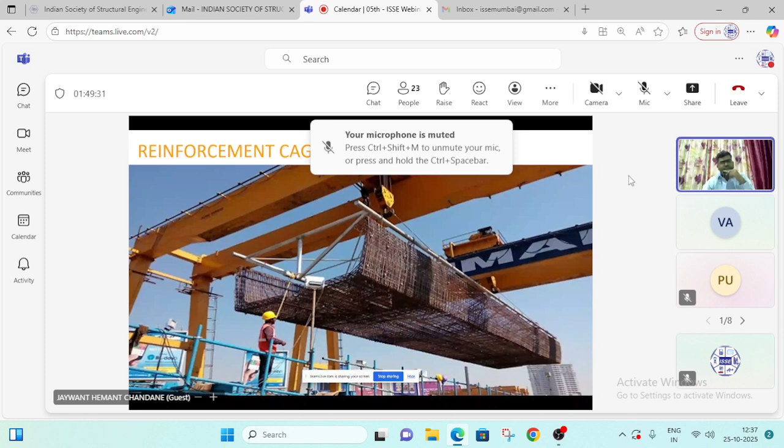So now we move to construction aspect. Here the basic reinforcement cage for U-girder has been placed. Reinforcement cage, the lifting of reinforcement cage by tower crane. Here the placing of concrete for shuttering.

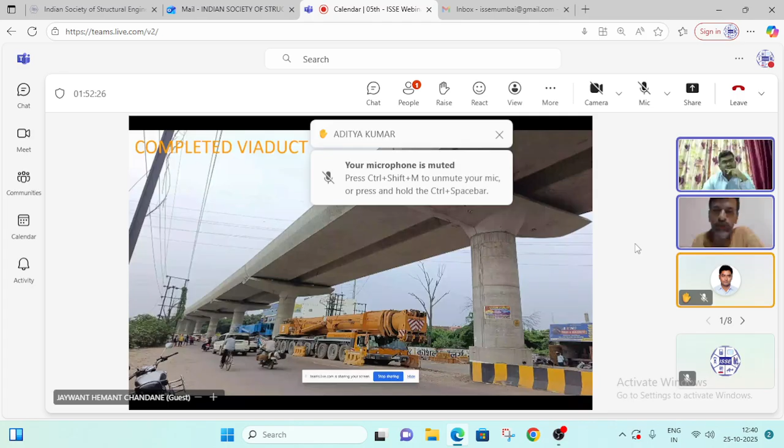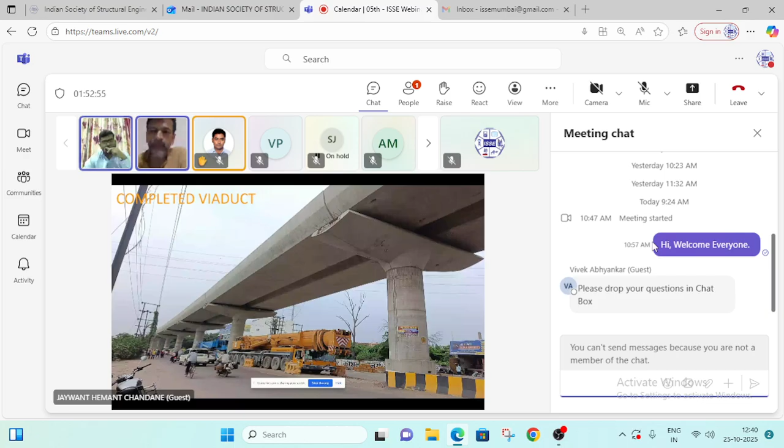ISSE President Vadalkar sir had asked if you can provide a PDF of step-by-step calculation for U-shape girder. It can be kept on our website for reference. So Jayant, you can share your calculation.

I will share within a week, actually, a week's time. Or take your time, but at least share in a week's time. Then there is a question by Abhijit Gavai.

He's asking, it was a very detailed and informative session. I have a few questions. Question number one is how much should be the typical span of a U-trough girder for a metro system, and would it be economical?

Actually, by various study, it is around 30 to 31 meters that is economical. Beyond that, the design changes because the bending moment at midspan will be increased. You can see that after a 30 meter span center to center, the residual stress is around 0.14 at midspan, and we cannot also increase the number of tendons. So I think 31 meter is the maximum economic span.

Then after that we have to increase the tendon, and it will increase the depth, the base slab depth and all. In some places like Mumbai and Delhi, what they have done is kept the 35-meter span and increased the width of the pier.